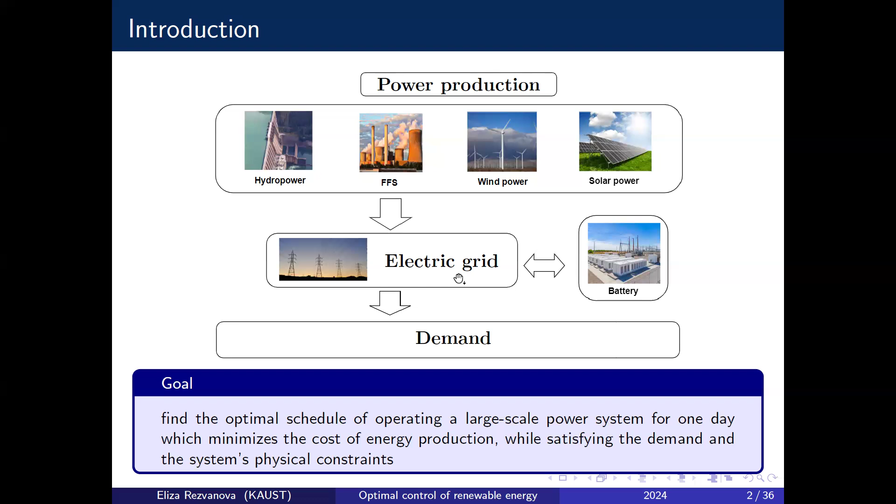We study an actual real power production system, specifically the Uruguayan system. Uruguay has been a pioneer in the field of renewable energy, with 87% of its power being produced by renewable sources in 2021. This has been made possible by the significant growth of wind and solar power in recent years. In fact, on some days, the demand of the whole country can be satisfied by wind power. But these sources, the wind and solar power, have very high variability on a time frame of 1 day.

So if we want to construct an optimal schedule for 24 hours, we need to account for this variability as close to reality as possible. We are working towards modeling the wind and the solar with SDEs, so that we will have a stochastic optimal control problem. Today I will present the paper which is the stepping stone towards this big stochastic optimal control of renewable energy project, where we work through the deterministic case.

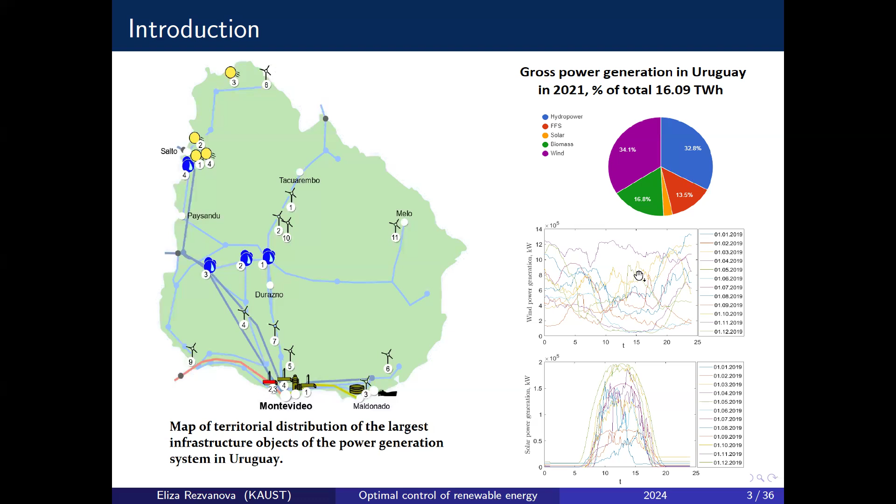A very distinctive feature of our system is the time delays, and this happens because we have 3 dams built on the same river. This is a situation that is very common throughout the world. In our case, we have 3 dams, Bonete, Baygorria, and Palmar, and it takes 6 hours for the water to reach from Bonete to Baygorria, and 10 hours for the water released from Baygorria to reach Palmar.

In many works, these time delays are either not taken into account or set to 0 for simplicity. But you can see that 6 hours and 10 hours are a big portion of the day and can significantly impact the optimal schedule.

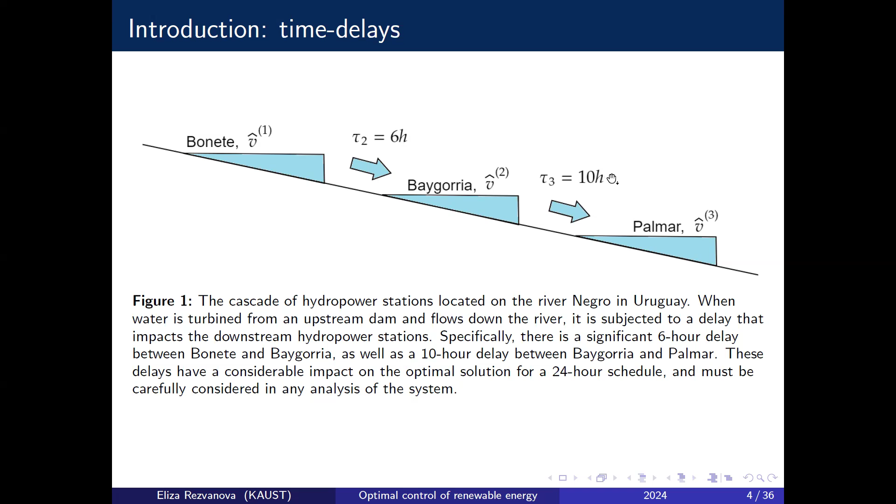I want to also outline what kind of solutions you can find in the literature and how our solution stands out. Many works focus on the discrete time approach, which leads to large-scale optimization problems that are then solved by nonlinear programming methods, integer, mixed integer programming, and network flow algorithms, depending on the objective function. I will tell you more about how the continuous time approach we are using is advantageous later when I talk about the results.

We have found a few continuous time solutions, but they are very specific to the system they analyze and are hard to generalize to a broader class of energy production systems. Time delays are considered only in a small number of works and only in a discrete time setting. Usually only small-scale systems are studied, like only hydropower systems or coupled hydrothermal and hydrowind systems, and we have not found any work that also includes the battery.

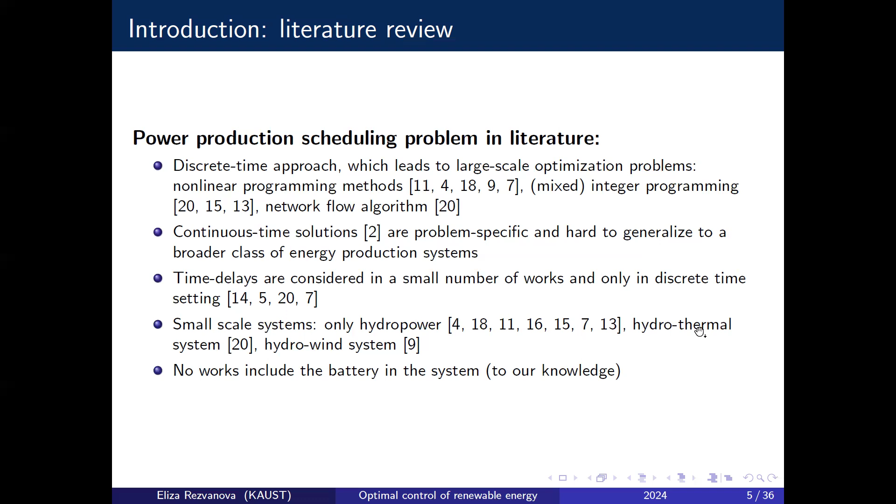Our approach to solving the power production scheduling problem is a continuous time approach, which allows for the extension of controls into points off of the numerical grid by interpolating the derivatives of the value function obtained through solving the Hamilton-Jacobi Bellman equation. This means that potentially having one solution, we can have access to schedules with different time resolutions.

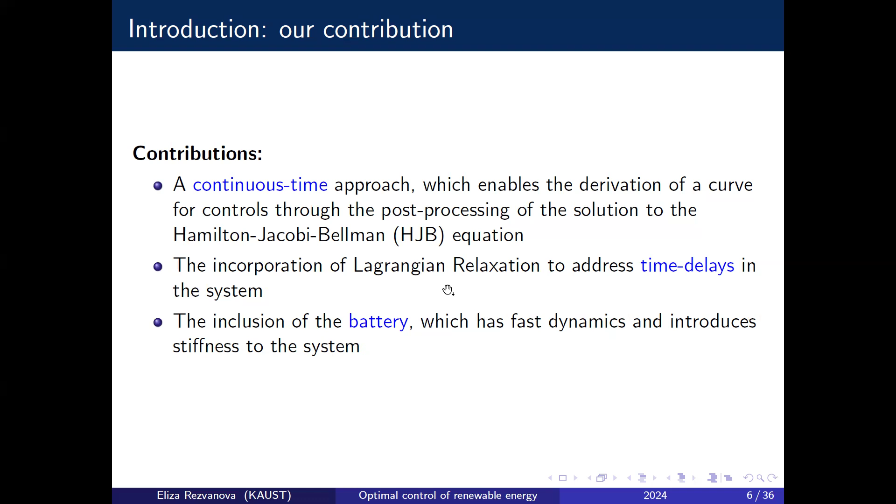We incorporate Lagrangian relaxation to address time delays in the system, and we also include the battery, which is very attractive for operators because batteries can significantly reduce the variability of power production through storing energy and redistributing it throughout the day. But numerically, it presents a lot of difficulties because batteries have fast dynamics compared to the other sources in the energy system.

Our goal is to produce as much power as needed and as cheaply as possible. Here you see the demand in Uruguay in different seasons of the year, and this is the real data that we use in our simulations. We want to meet this demand by producing power with the dams, PH the hydropower, the fossil fuel stations PF, and the battery PA. Now I will describe how we are modeling each of these power sources.

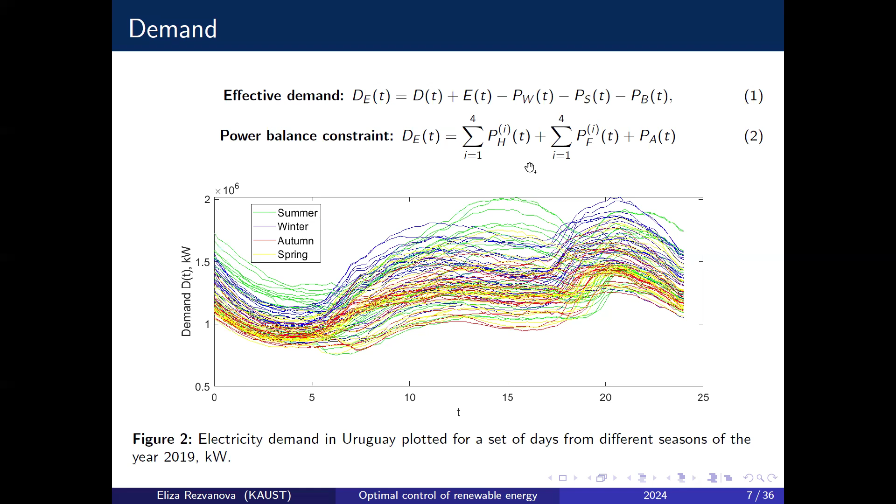Our model of the dams describes the state of the system through the volume of water in the dam V, which we can control through the turbine flow phi T and spillage phi S. Both the turbine flow and the spillage are functions of time and volume, and the dependence on volume is related to the construction specifications of the dams.

The power produced by the dam depends on the water that we turbine and spill, and also on the water difference, the upstream level of water H capital and the downstream level H. So on the one hand, the more water we turbine, the more power we produce. But on the other hand, the more water we turbine and spill, the more we raise this downstream water level, which reduces the power production. The resulting function, which accounts for both of these counter effects, and the coefficients eta and d are something that can be calibrated from the data.

Next, we consider the cost of power production, which is simply equal to the amount of water that we turbine and spill throughout the day, multiplied by the cost of water KH. These coefficients KH represent the future value of the water, and they reflect the ability of the dam to substitute for more expensive power sources like fuel. They are usually the outputs of midterm optimization problems, and in our work are taken as input.

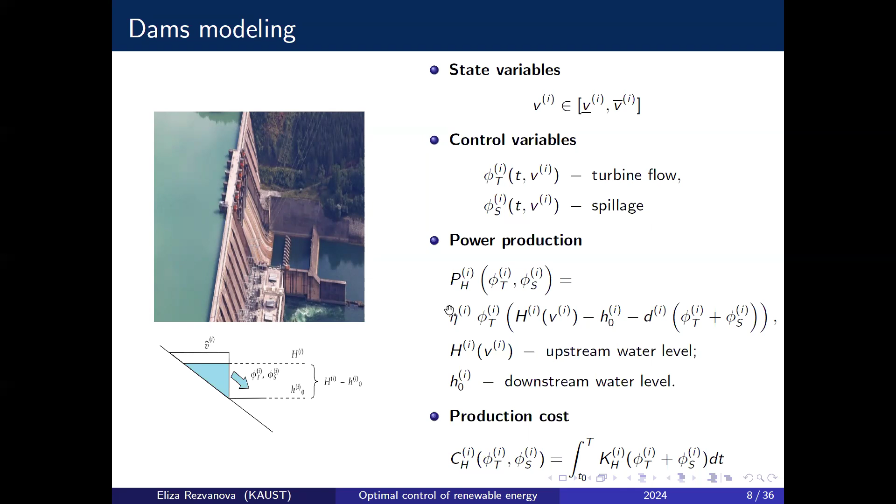Here you can see the dynamics of the dams, which we derive from the balance between the inflow of water and the outflow of water. There are two types of dams, connected and non-connected dams. A dam is considered connected if it receives water from an upstream dam. In our case, it's Baygorria and Palmar.

The inflow for these dams consists of the natural inflow I, like rainfall, and the water received from the upstream dam, released from that dam sometime in the past, T minus tau. The outflow is simply the water that we turbine and spill at current time. We also have physical constraints on the boundaries of the domain where the dams are either empty or full.

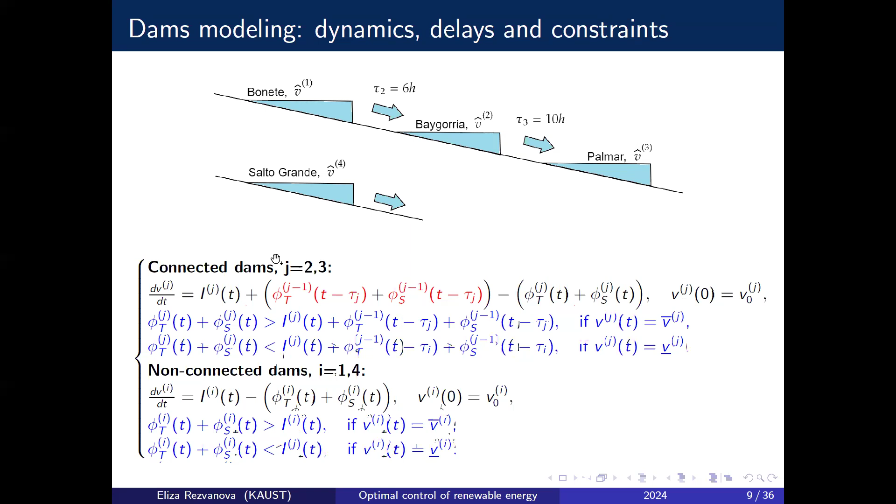The non-connected dams are Bonete, which is the first dam in the cascade, and Salto Grande, which is built on a different river. The corresponding dynamics are similar, and they just don't include this water from the upstream dam terms.

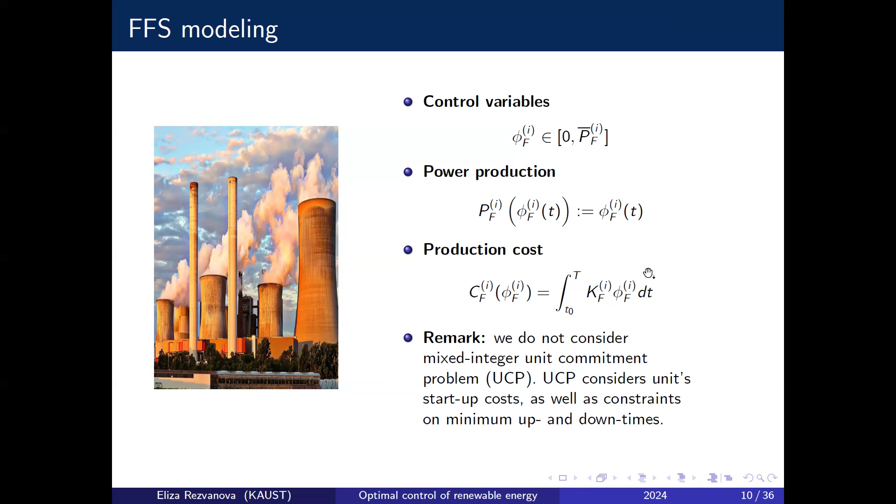The modeling of the fossil fuel station is straightforward. We control the fossil fuel station with phi F, which is simply equal to the power that we produce. The cost is equal to the power produced multiplied by the cost of fuel. In many works, you can find the unit commitment problem that also considers the startup costs as well as constraints on minimum up and down times. This is something that we can consider in future work.

In our system, we added the storage capacity, which we model by a single large battery. We describe the state of the battery with the current charge A. We consider that there are no power losses when we're using the battery, no operational costs, and no aging effects. We control the battery with a power flux phi A. The negative value of phi A represents charging the battery, and the positive value represents supplying energy from the battery to the grid.

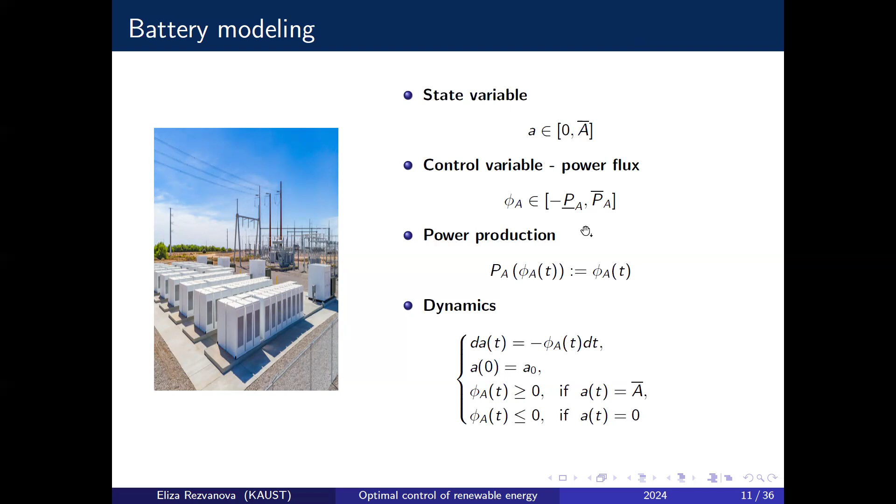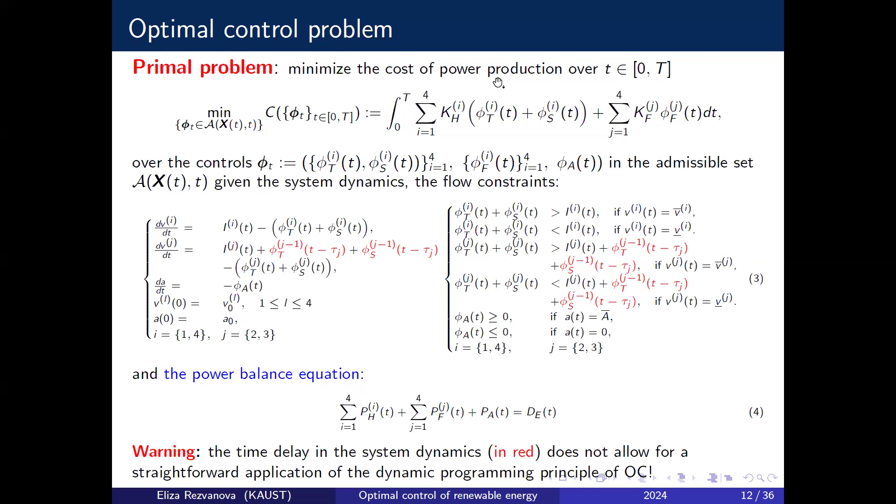We address this problem by formulating the dual problem using the Lagrangian relaxation. We first introduce the virtual control psi at current time t, which is simply equal to the water turbined and spilled from an upstream dam sometime in the past. The idea is to relax this constraint by adding it into the value function and penalize the violation of this constraint with the Lagrangian multipliers lambda.

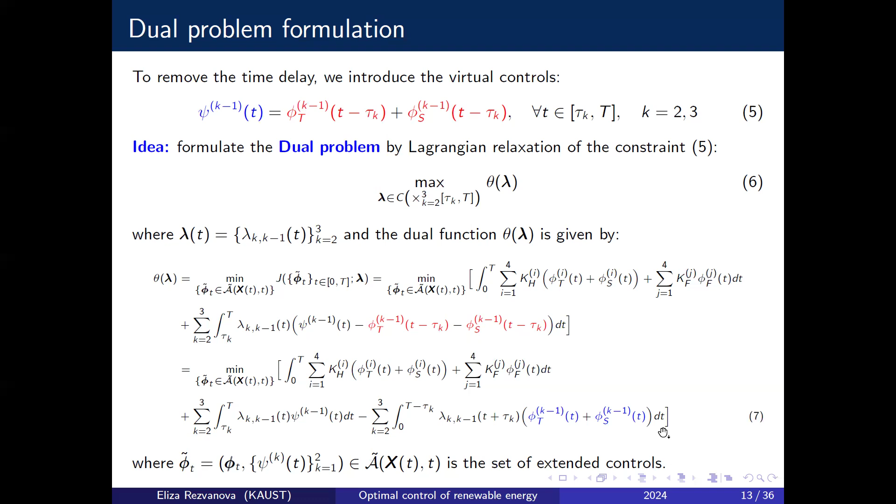Yes, and then the dual problem will be formulated as maximize this new dual function theta of lambda. This approach allows us to have all the terms, after some algebraic manipulations, represented at the current point in time t, and not depend on the past. So instead of solving the initial primal problem with time delays, we are going to solve the dual problem without time delays and use that solution to construct the solution of the primal problem.

The dual function is subject to similar dynamics and constraints where, like I said, all the terms are now given at the current point in time, and we can apply the classical dynamic programming principle to associate an HJB equation for the dual function theta of lambda for a given lambda. Another advantage of such an approach is that the dual problem will be a concave problem, and this will be very convenient in the optimization.

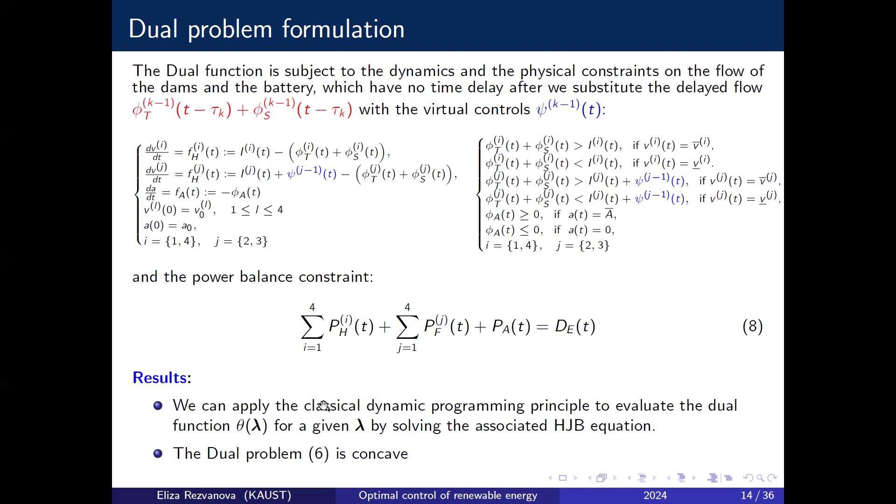The Lagrangian multipliers lambda are in general piecewise continuous functions. This means that the dual problem will be an infinite dimensional optimization problem where one seeks to satisfy the constraints pointwise in time. Instead, we will satisfy these constraints on average over lambda discretization intervals, which implies finite dimensional optimization. So we will approximate these Lagrangian multipliers with a sequence of piecewise constant functions, and we can control the quality of our approximation with the number of intervals in this time mesh, or lambda discretization. The more intervals we have, the better the approximation will be.

With this approximation of lambda, we know from duality theory that the dual problem is a concave and non-smooth problem. It's good that it is concave, so any maximum we find, we know is going to be a global one. But since it is non-smooth, we will need to look for appropriate optimization methods.

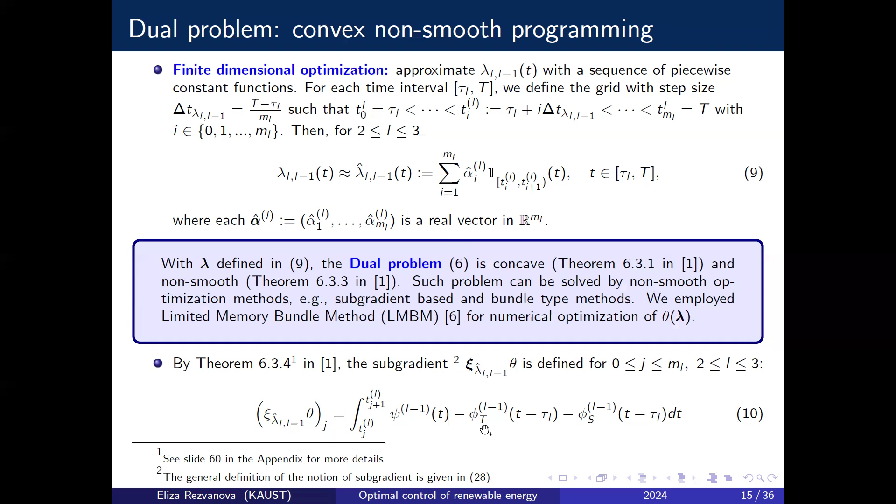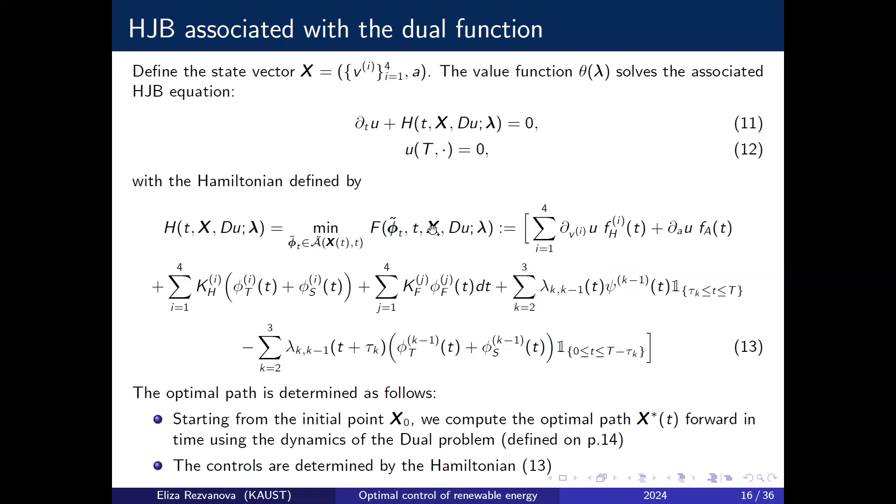And here you see the HJB equation in 11, 12, and 13, which is associated with the dual function theta of lambda for each given lambda. This is a first-order nonlinear partial differential equation, and upon solving it, we can compute the optimal path, starting from the initial point x0, forward in time using the dynamics of the dual problem, the relaxed problem. And we determine the controls at each point in time by minimizing this Hamiltonian in 13.

Now, once we find the solution of the dual problem, it will not in general be in the admissible set of the primal problem. This happens because we solve the problem numerically and we also approximate lambda with piecewise constant functions. So there will be a violation of the constraint where the virtual water should be equal to the real water. We devise a heuristic procedure to compute the primal admissible solution.

And it goes like this: we modify the Hamiltonian of the dual problem by substituting back, instead of this virtual water, the real water released from an upstream dam in the past. We compute the primal admissible path x tilde forward in time using the dynamics of the primal problem, the initial original problem, and determine the admissible controls by minimizing this modified Hamiltonian.

And now in this case, since we're moving forward in time, these terms that seem to be depending on the past will not be a problem for us, because they are not even controls at time t. They are inputs, because we have computed them at previous time steps.

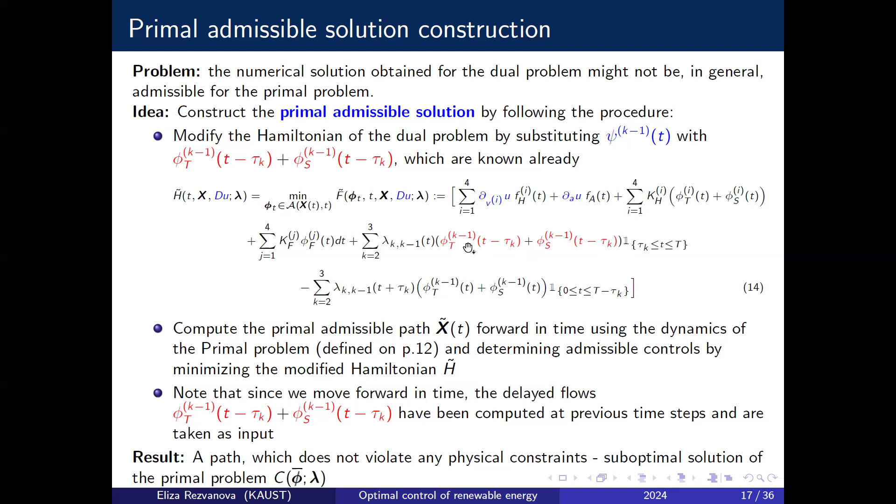Another problem that we face is that the controls that we compute may not be smooth enough for the operator to implement them in practice. So to smoothen the controls, we will do the following: we add the H1 semi-norm of the controls to penalize large variations of the controls.

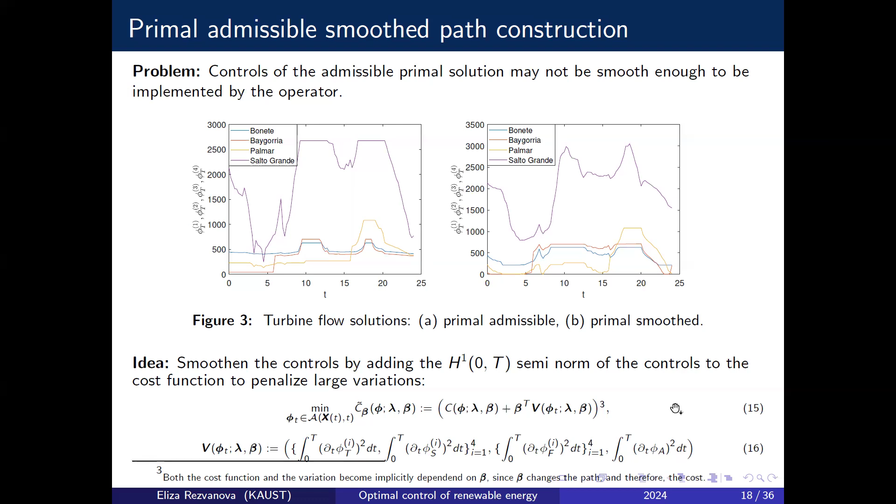This can be seen as a regularization of our initial value function, and these coefficients beta can be seen as Tikhonov regularization parameters. Again, since we have the derivatives in the value function, we cannot directly associate an HJB equation to this function to solve the problem. So what we do is the following procedure: we first approximate the derivatives of the controls with finite differences, like this.

We modify the Hamiltonian of the primal admissible problem by adding the penalization of the derivatives of the controls into the Hamiltonian, like these red terms over here. These terms that seem to be depending on the past will just be input that we have computed at the previous point in time.

We compute the primal smoothed admissible path x bar forward in time using the dynamics of the primal problem, determining admissible controls by minimizing this modified Hamiltonian. By varying beta, we get different paths of controls with different levels of smoothness. There is a way, for example an L-curve approach, which can help us choose these beta parameters in an optimal way.

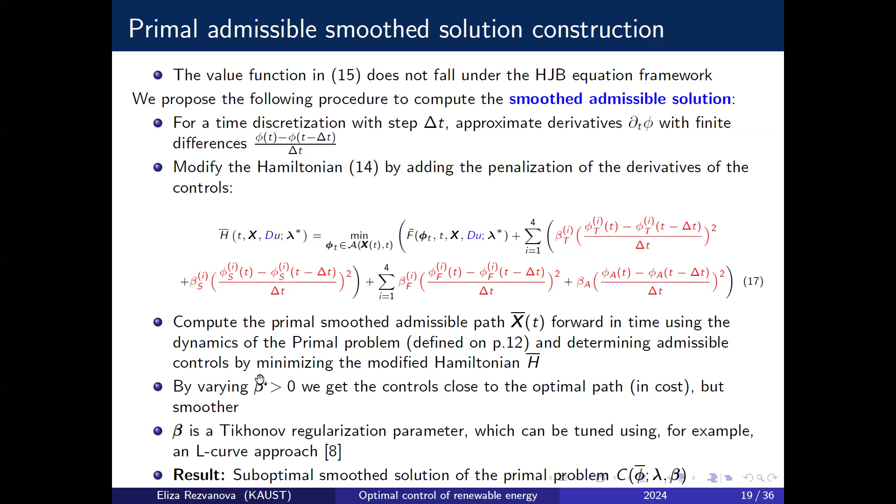Now we have computed the dual problem solution and found some suboptimal smooth solution of the primal problem. We ask, is there a way to estimate the accuracy of our solution?

From the duality theory, we know that the dual problem in blue, the true dual solution, is a lower bound of the true primal solution in red. This is the dual gap star, the quantity that we want to estimate.

We know we compute the suboptimal solution of the primal problem, the minimization problem, which means this will be an upper bound for the true primal solution. When we compute the dual solution, we approximate lambda with piecewise constant functions, so we know it will be a suboptimal solution of a maximization problem, giving us a lower bound on the dual solution.

Therefore, this dual gap for given lambda that we estimate will give us an upper bound of the true dual gap. Keep in mind that this primal in orange and this dual in green are theoretical quantities that we do not have direct access to. We only estimate them numerically.

So as long as we control the numerical errors in the procedure, we control the dual gap. We can put an upper bound on the true dual gap, which consists of the numerical dual gap that we measure and the sum of the errors introduced in the procedure.

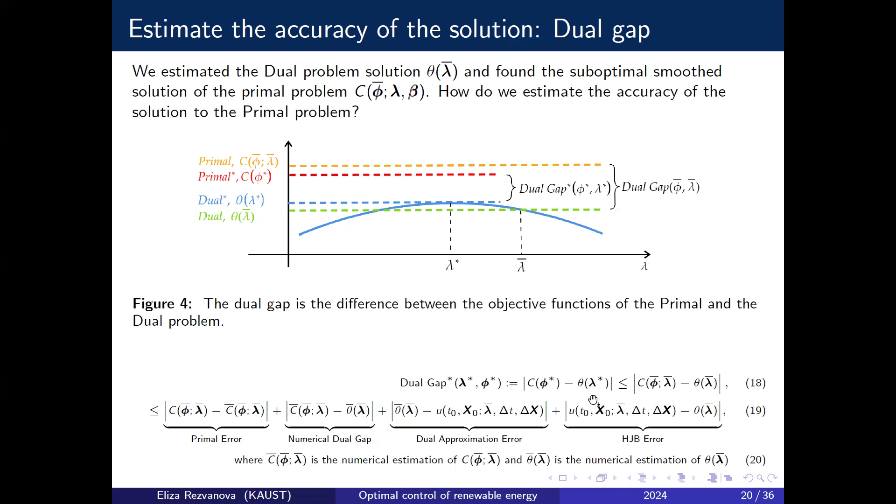Now I would like to tell you about the algorithm that we are using to solve this problem. It consists of three main blocks and is organized as follows.

First we choose the lambda discretization, the refinement of lambda, and initialize it with lambda 0. We solve the HJB equation with given lambda and obtain our evaluation of the dual function theta and the corresponding subgradient xi. We then pass this information into the dual optimizer, where we compute the next iteration of lambda using the limited memory bundle method.

We pass this lambda back into the HJB, and we go through this loop for a fixed number of iterations.

Once we're out, we can compute the primal smooth solution and the corresponding duality gap. If we're satisfied with the tolerance we set on the duality gap, we stop. If not, we go back, refine lambda further, and repeat the procedure.

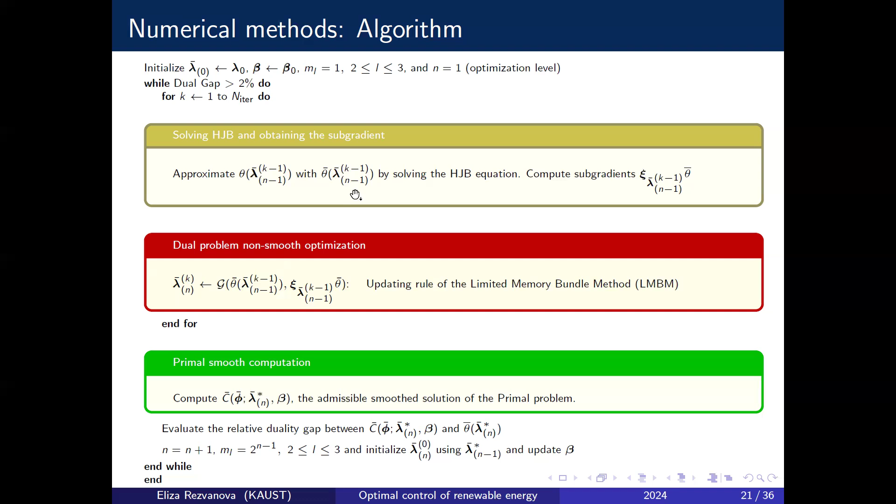Now I will talk in more detail about each of these blocks. First we look at the numerical solution of the HJB equation, and we employ the backward in time upwind finite difference scheme for the HJB equation, which has been shown in the literature to converge if the scheme is monotone, consistent, and stable. The condition that ensures stability is known as the CFL condition, and it so happens that the same condition is enough to ensure the monotonicity of the Hamiltonian.

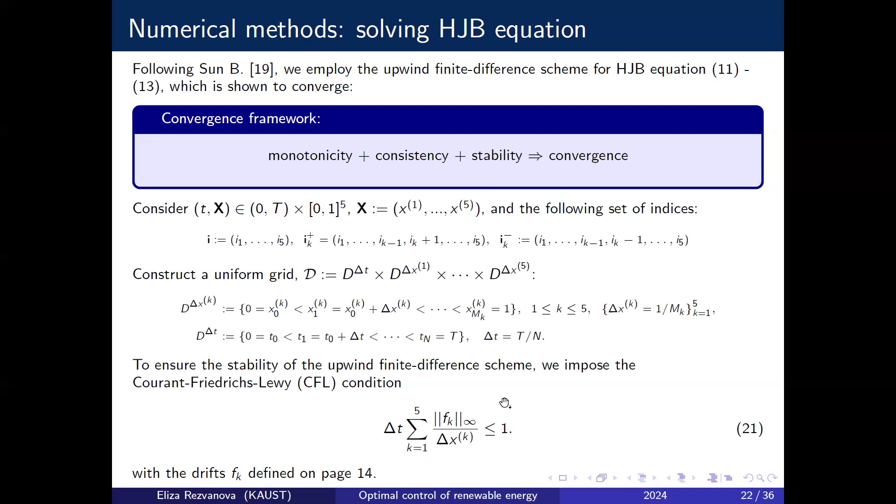In the upwind finite difference scheme, we have two options to approximate the spatial derivatives: the upwind derivative d-plus and the downwind derivative d-minus. Which one we choose at each point depends on the value of the drift term for each of the power sources in the system.

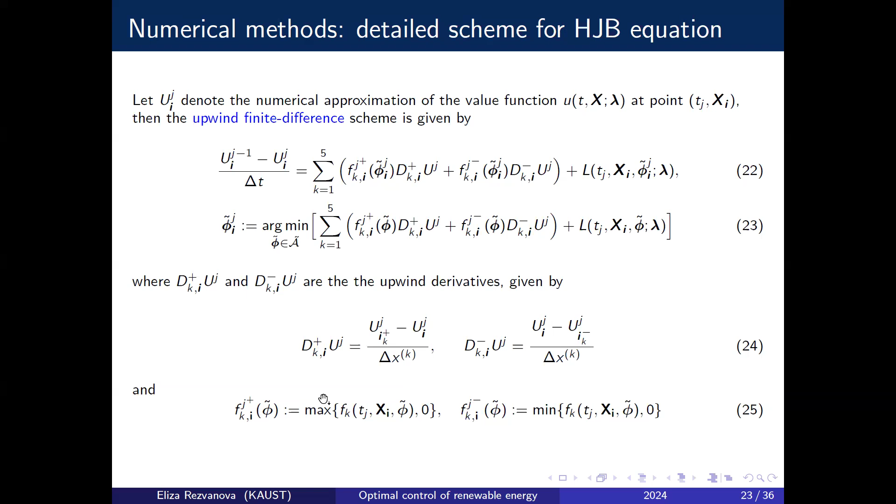By the end of this step, we will have the dual cost and the corresponding subgradient, which we pass to the optimizer.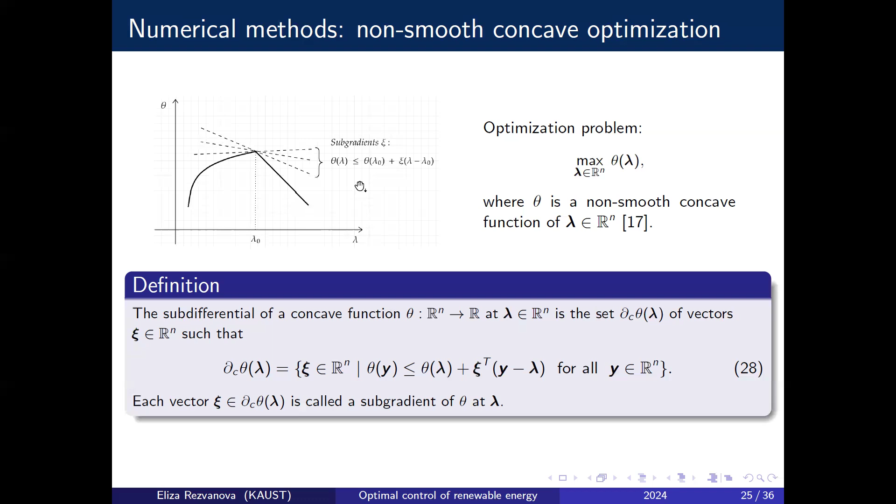We will be using one of the subgradient methods in our optimization. The dimension of our optimization problem depends on our refinement of lambda. Recall that we approximate lambda with piecewise constant functions, and the number of intervals is something we can choose. The more intervals we have, the better approximation of lambda we will have, but on the other hand, we also increase the dimension of the optimization problem.

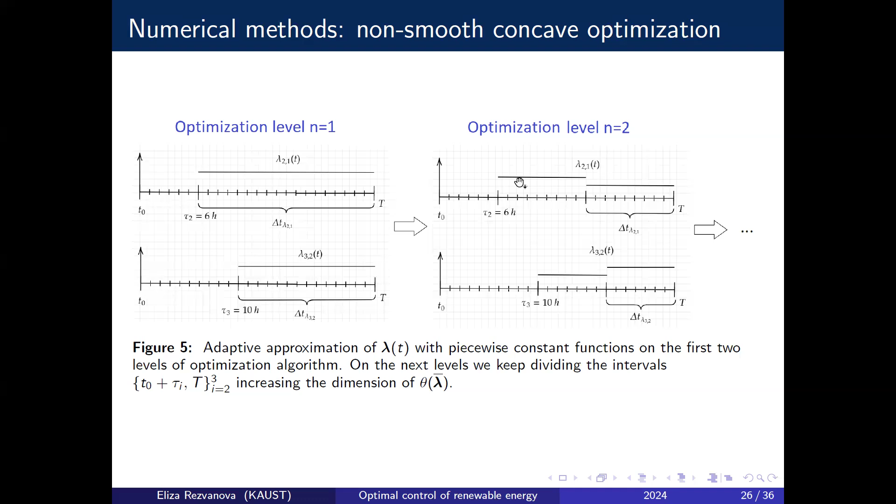In our work, we've chosen the following approach. We start with the coarsest level of discretization, and then we keep refining lambda and increasing the dimension of the problem until we get the dual gap that we are satisfied with.

The following theorem provides the necessary and sufficient conditions for a concave non-smooth function to attain its global maximum. The conditions are that either we have 0 in the subdifferential, or that the function is non-increasing in any direction d. The popular methods, the subgradient and the bundle methods, differ in the following way.

The subgradient methods use only the single subgradient to compute the next step. The bundle methods accumulate information about subgradients over a number of iterations and use them to create a piecewise linear approximation of a function at a given point. These methods are much more complicated, but they converge much faster. The method that we use, the limited memory bundle method, is of a bundle type.

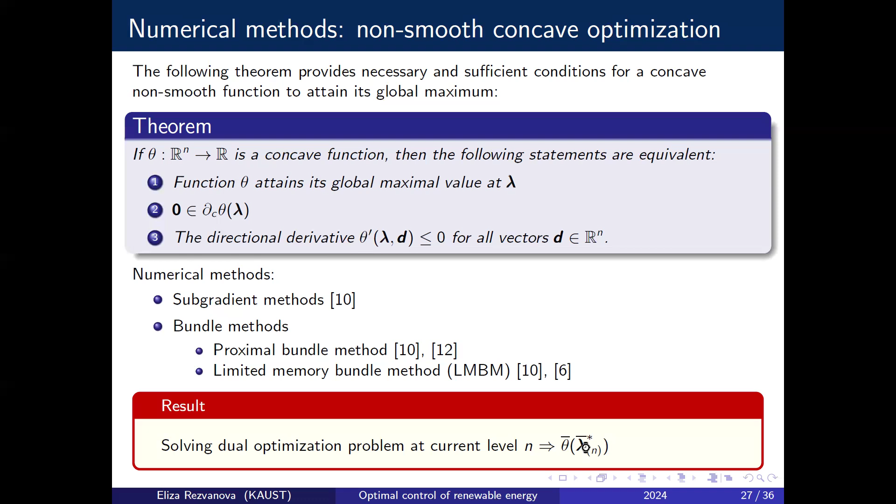By the end of the loop, we will have found the optimal solution for a given approximation of lambda. Now, before we can compute the dual gap, we need to compute the primal smoothed solution, and before that, we need to choose these coefficients beta in an optimal way.

We penalize controls and tune these parameters separately for different types of controls, and I will explain how we do it using the battery controls as the example. First we compute the primal cost C bar and the variation term, this variation of the controls over the path, V, separately for a set of values of beta.

Then we plot this variation term V over the x-axis and the cost over the y-axis, C bar, and what we will have is this kind of L-shaped curve. The points on the far right of this curve correspond to the smallest values of beta, where the controls are not yet smoothed, and they are very close to the optimal path. As we start increasing beta, the variation term will decrease because the controls will become smoother, but since we are moving away from the optimal path, at some point the cost will start to increase.

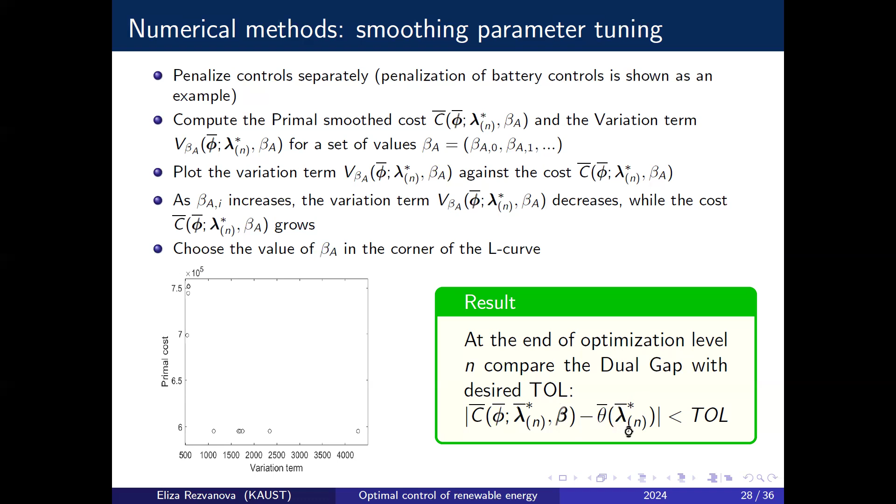Once we have plotted these terms as we do on this plot, it is easy to see which values of beta will give us the best results. This will be the values that are as smooth as possible without increasing the cost too much. Now, after computing the primal smoothed cost, we can compute the dual gap and decide if we reach the desired tolerance level or we need to go back, refine our approximation of lambda, and repeat.

This is a good point where I can explain how our continuous time approach is advantageous to the discrete time one. Suppose you have computed these controls using a discrete time approach with a time step in the schedule of 1 hour, and now you want a schedule with better resolution. You'd have to recompute the whole problem, because it's difficult to expect good results from interpolating these unpredictable controls.

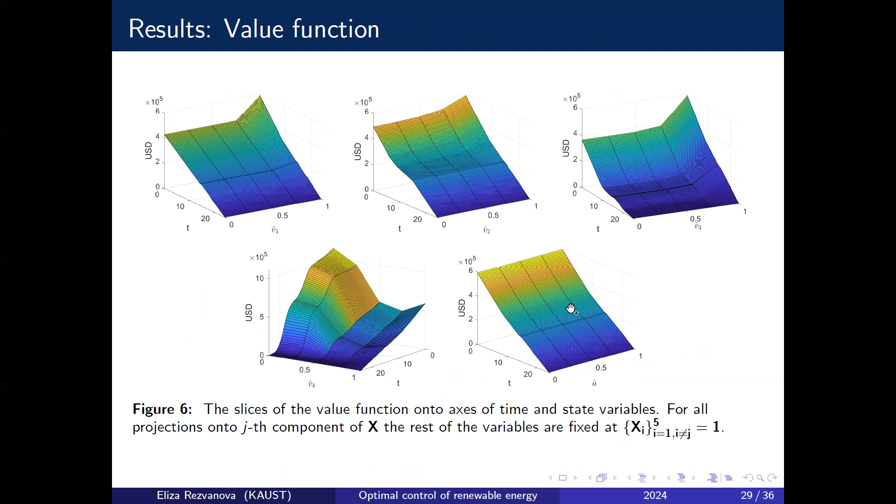But in our approach, we compute these controls using the very nicely behaving value function. It is more reasonable to expect that we can use the derivatives of these smooth functions and have a good interpolation of the controls from that.

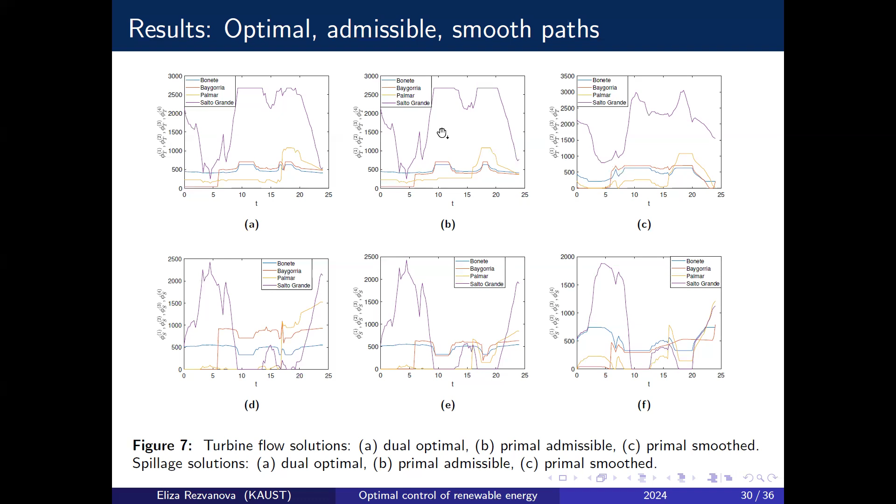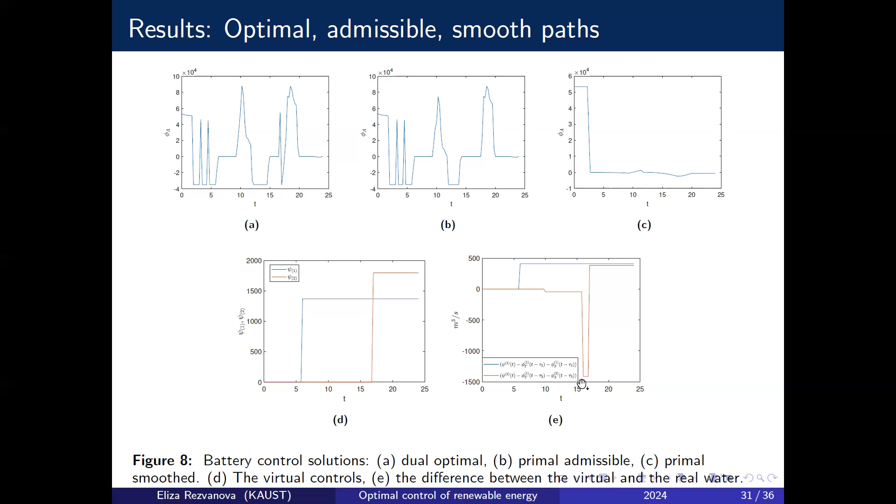Otherwise, this type of plot can be used to suggest a non-uniform discretization of lambda, where we could, in principle, approximate lambda with one constant on this big time interval, approximate on this small interval with a different lambda, and then a different lambda over here.

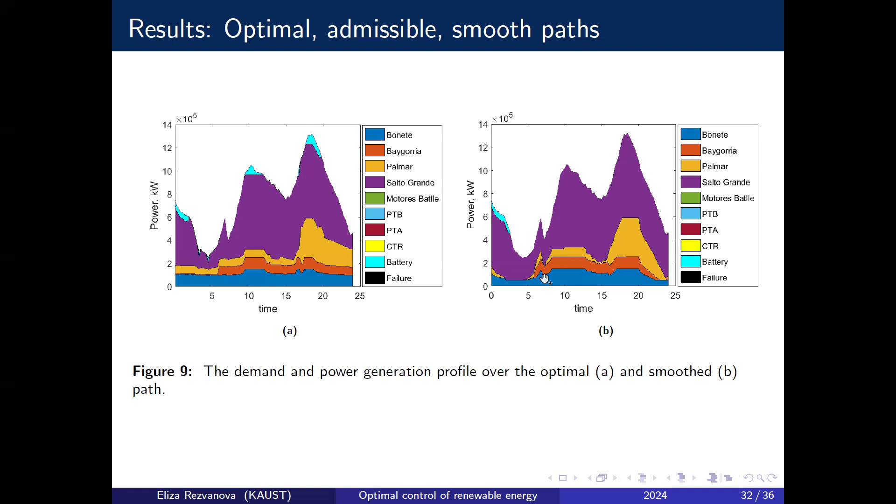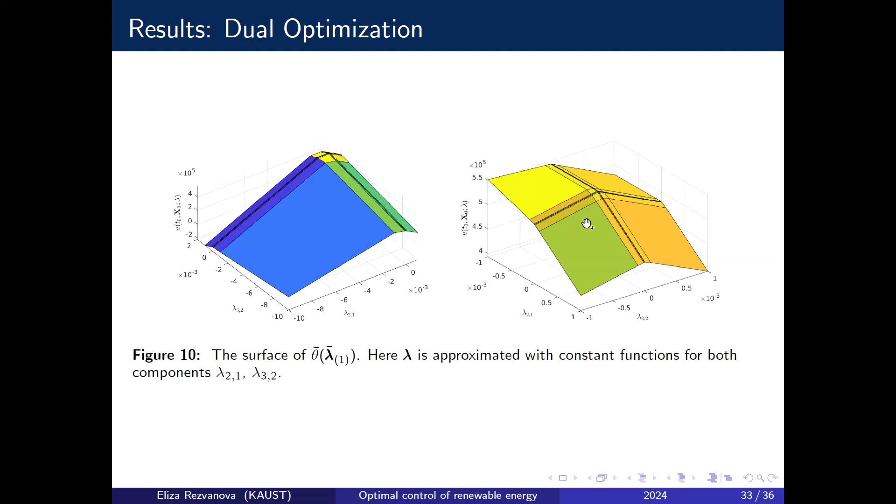This is a good illustration of why the optimization is complicated, because we have kinks in both directions of the function, and we never actually reach the zero value of the subgradient. Whenever we are reaching the optimum, the subgradient will start jumping from one side to another, and this happens in every dimension. So the higher dimensional problem we have, the even more difficult the optimization will be.

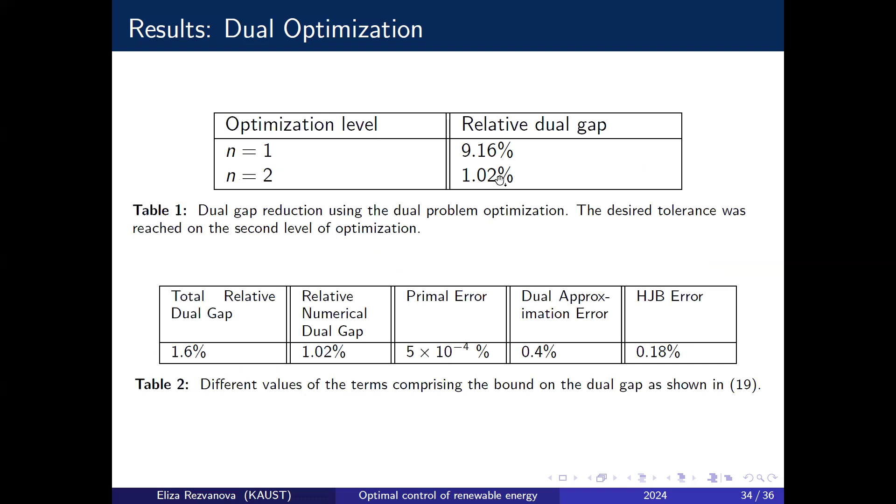And here are the results of the optimization. We had a relative duality gap of 9% on the first level of lambda refinement, and on the second level, we already reached 1%. Such good results have been obtained with a very efficient optimization method, the limited memory bundle method.

With that, I would like to conclude my talk and mention some directions of further research. The first thing we are currently working on is incorporating the stochastic modeling of the wind and solar power, which results in a stochastic optimal control problem. The most difficult part is the optimization of the stochastic dual function, and we've been trying different optimization methods—this is quite a difficult task, I should say.

Another direction we can go with is the reduction of dimensionality of the HJB equation, if we propose a suitable ansatz for the dependence of the value function on all those dimensions except for one. We also use the Markovian projection to merge all the stochastic processes in the system—the wind, the solar power, the demand—because as you've seen, we already have 5 dimensions in our deterministic problem, so we cannot afford to enlarge the space too much.

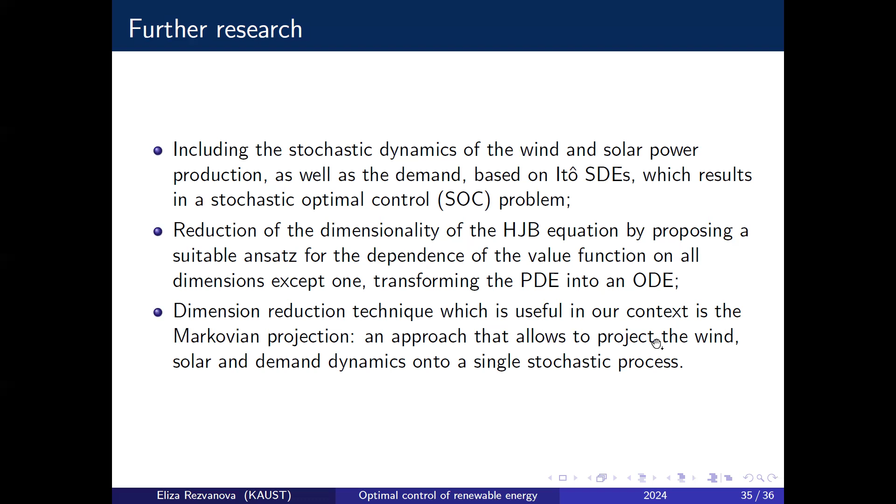Thank you for your attention.